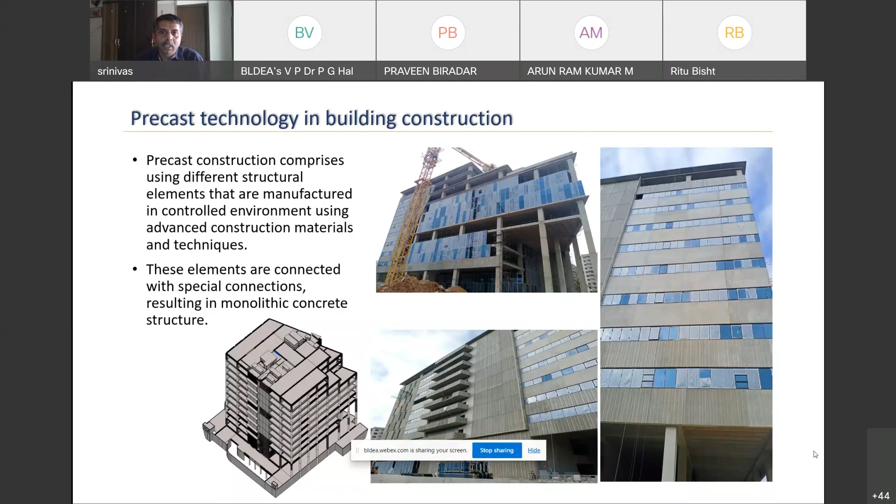So why are we looking at precast when we have very good cast-in-situ construction going on, with a lot of people working on this? First of all, there is always a dearth of skilled labor. So with this, you always have to resort to some kind of alternate construction, and the answer would be something like precast for that. Apart from this, developers are also looking to adopt modular technology so that they can save a lot of time. And the ask is always definitely superior quality, sustainable products, durable products, and more aesthetic appearances. So with all this demand, and also the current pandemic situation where there's a lack of manpower, the smart way to really achieve all such required things is precast construction, and that is the need of the hour.

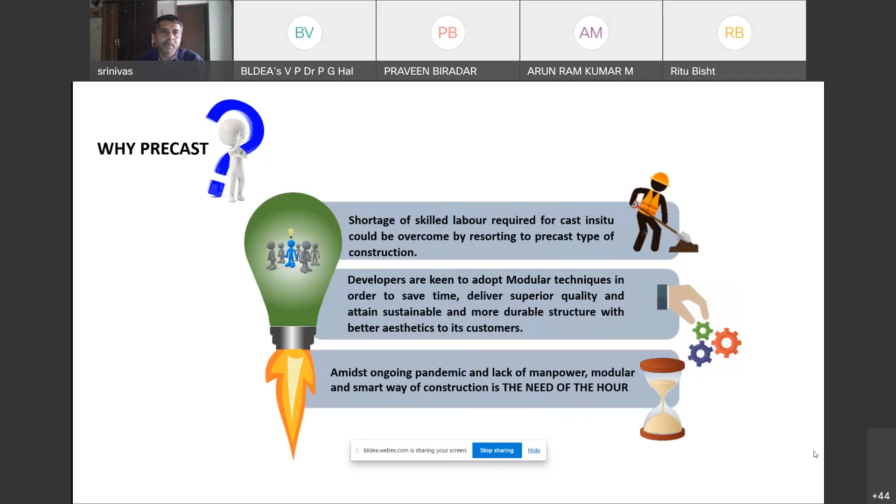So let us see all the kind of benefits we are getting with precast construction, so that we understand exactly why this has been adopted nowadays.

I've already mentioned the labor intensity you see in cast-in-situ construction. Usually when constructing buildings, you'll see hundreds of people walking around, a lot of activity happening. On the other side, what you see is precast construction, where one can also see multi-level construction happening compared to the single level on the other side.

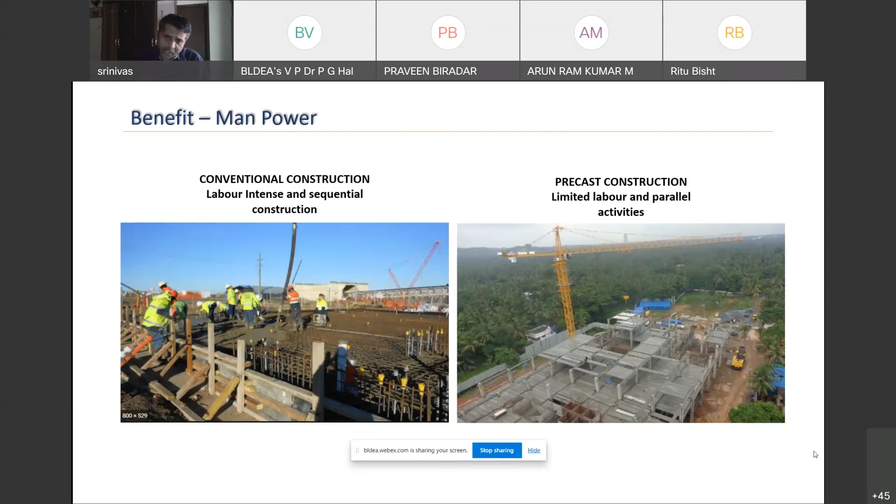Apart from that, you see very little labor intensity, just some machinery going on there. For a site like 10 lakh square feet or 6 lakh square feet, not more than about 50 people, including the project manager, engineers, and laborers, will be there on site. Especially for erection, you'll hardly see about 10-15 people. The rest will just be managing things. So this is the first advantage we really get from precast.

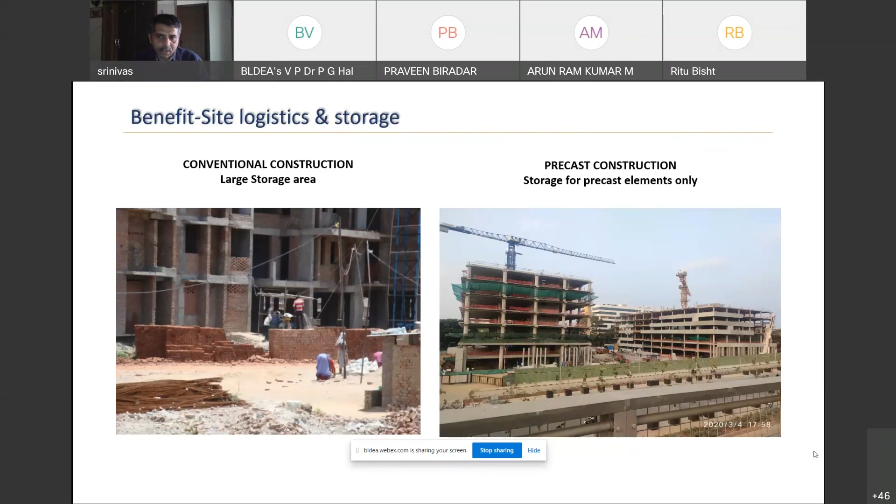The crane is a major kind of equipment which has to be used in precast construction. Cranes will also be used in conventional construction, the only difference is we'll have a little higher capacity cranes here. This is one of the differences we have.

And the scaffolding - in conventional construction, you'll have a lot of scaffolding materials to deal with. You have to support the members, then de-shutter that, and for any other work you'll have to put up scaffolding again. But in this system, we don't need scaffolding materials at all. It'll be designed in such a way that it can be self-standing, which will really help optimize the costs.

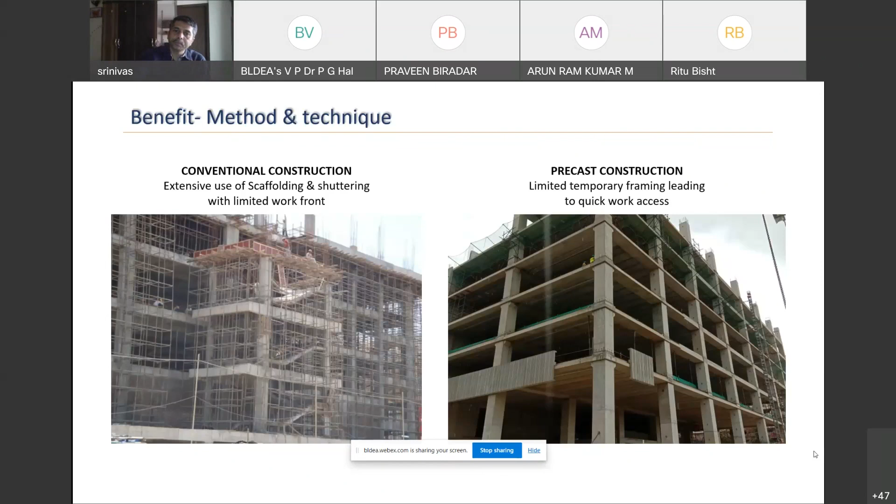And definitely, quality is what we always look at. It's not to say that cast-in-situ construction is very poor in quality - it's just a photograph depicting this, and there are a lot of constructions which have come up good. But what happens is in cast-in-situ construction, designers or anyone take a little liberty because they have a lot of chances to make changes during construction, and this leads to chipping in, breaking in, all those things.

Whereas in precast construction, we take care of all these things much ahead of construction - I'll deal with this a little later. So whatever finished product we get, it'll be a wonderful product. The one you see here is one of the hospitals which has been built.

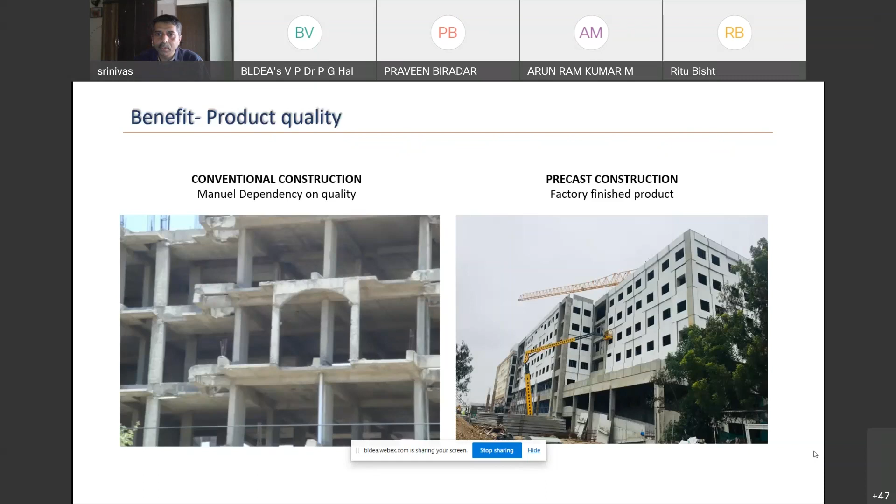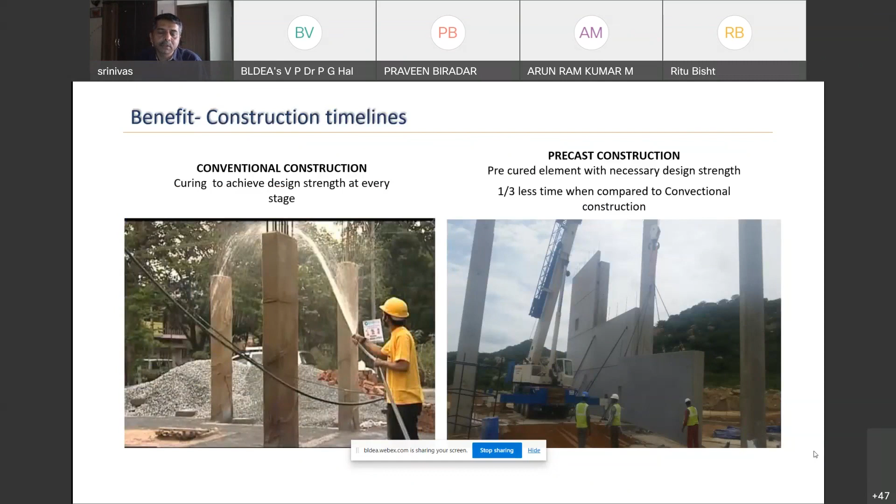Apart from this, the curing we achieve, since it's a very highly controlled product, the controlled environment really makes precast a very good material, and you don't have to spend anything on curing or anything further.

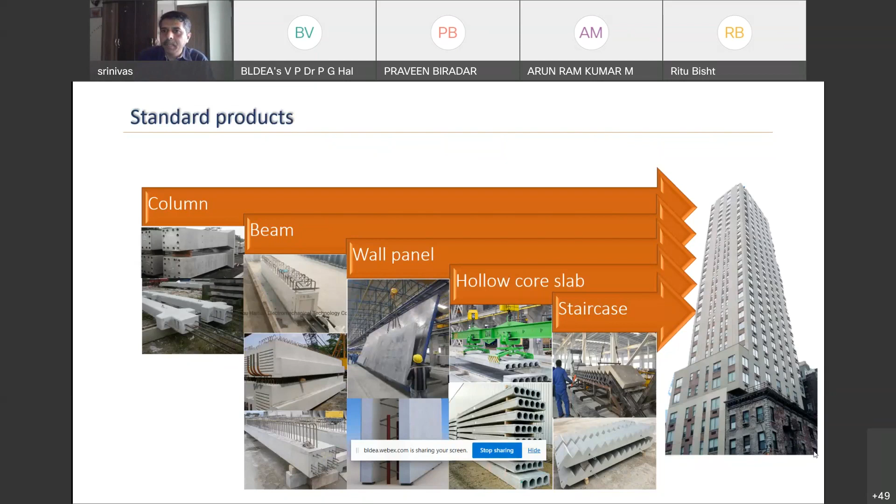Further than the structural elements, there are also things we use as architectural elements. One can use this as a finished product. The walls I was showing you, the solid walls, you can also have something called graphic concrete.

A graphic concrete is a technology that transfers custom or stock images.

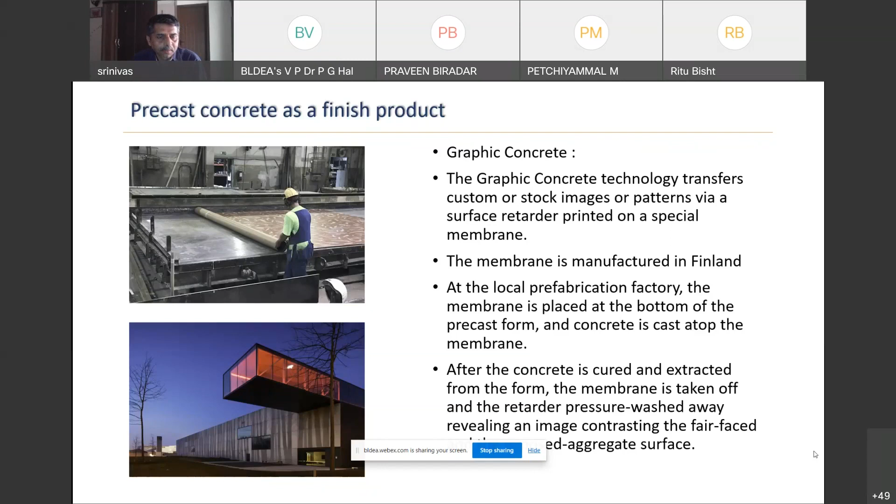You can see the contrasting fair faced and aggregate face just coming out, and you can see the images on the left hand side, where it almost depicts a kind of forest or whatever is there. There are a lot of other things which can really be done with graphic concrete.

Apart from this, there are also concrete form liners, called RECKLI forms. These are rubber-based kinds of forms, which can be used for repetitive uses, whereas graphic concrete is a one-time kind of use.

Once the pressure wash is done, that membrane is gone, and you'll have to have another roll of paper or whatever to be laid. But with RECKLI forms, that's not the case, you have a lot of other patterns available.

One can actually get into this website, and whoever is interested can look into that. You get a whole variety of forms which give beautiful patterns, and these are walls we usually use for facade kind of construction.

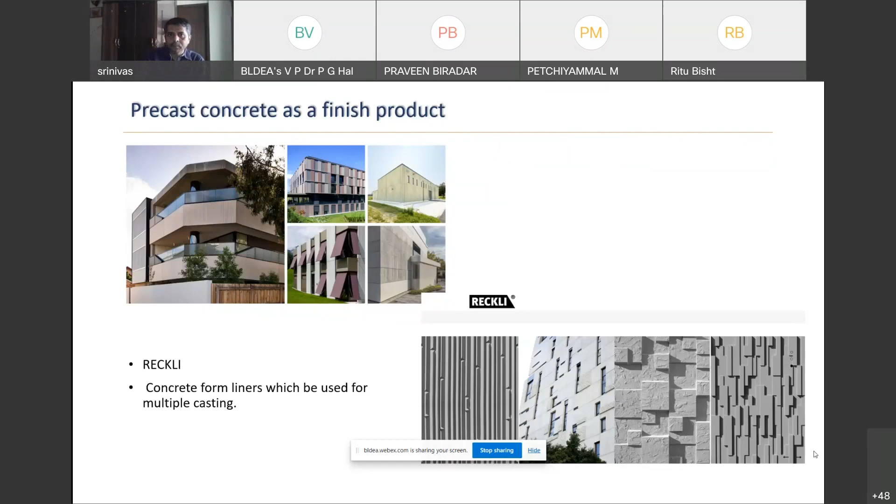So all these products are actually manufactured in a controlled environment. That is what I was saying from day one, I mean from the earlier slides.

In precast, one has to literally have very good knowledge of what plant you're dealing with. The reason is all your members or whatever is there have to be designed according to the limitations of the plant. So a designer has to keep in mind the plant limitations, and based on that, the member sizes have to be in accordance with that.

So the next one is the hollow core bed. The hollow core bed usually is around 100 to 120 meters long, with pre-stressing strands and abutments on either side. These hollow core slabs are pre-stressed, and there will be extruders used, and machines which will be used, wherein you can just get the hollow core out.

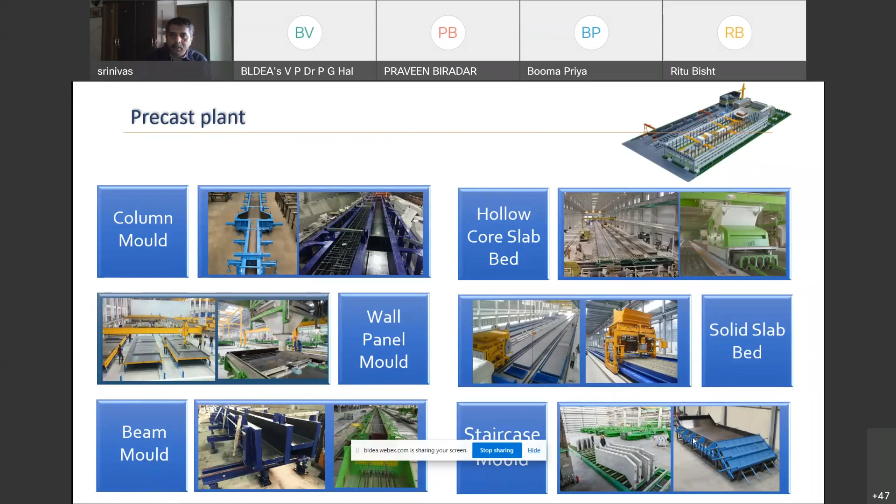Apart from that, beam molds, then again with the pre-stressing kind of unit here, then the staircase units. This kind of facility will usually require a lot of capital to install all those things and then invest in that. But alternatively, there is also a way where we can have a mobile plant.

The drains, and there are a lot of other things. I think what we are doing right now is on a similar basis, that we use the existing site, which requires a certain amount of space. So we put in all these molds there, and concrete is cast there, and directly installed as soon as it's ready to be installed.

The advantages of this is that you will save a lot of logistic cost from the factory to the site, if one has to transfer all those things, the cost involved in that. But in a mobile plant, you can definitely get away with that.

The only other limitation is that you may not find a pre-stressing bed here, which has to be actually - you will have to get it from the factory itself.

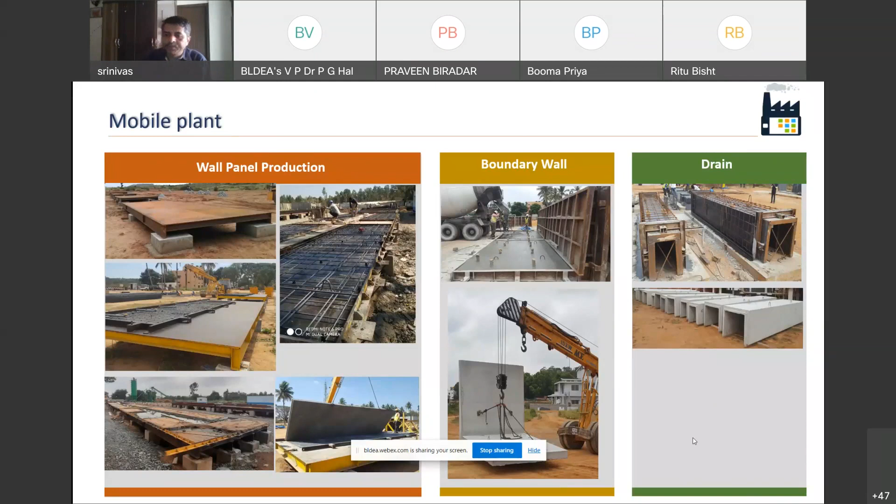So let us understand how the precast construction flow would be. The first thing is the design information and coordination. The design involves three stages: design information and coordination, the structural design, and the 3D model production drawing. These three form the first part.

Here one has to understand that once you're doing the structural design, along with that you'll have to have a lot of coordination with your services so that everything is accommodated. This is where the 3D model production comes in, so that you can have a view, and there should be harmony between the structural elements and also the MEP requirements. Once you have all those things, the member sizes and all those things get frozen.

So with that, there'll be a shop drawing production which goes to the element production. Then usually what we do is the foundations will be cast in place. It's usually after the foundations are done that the members will be transferred to the site and the installation happens, and the finish and handover is the execution part.

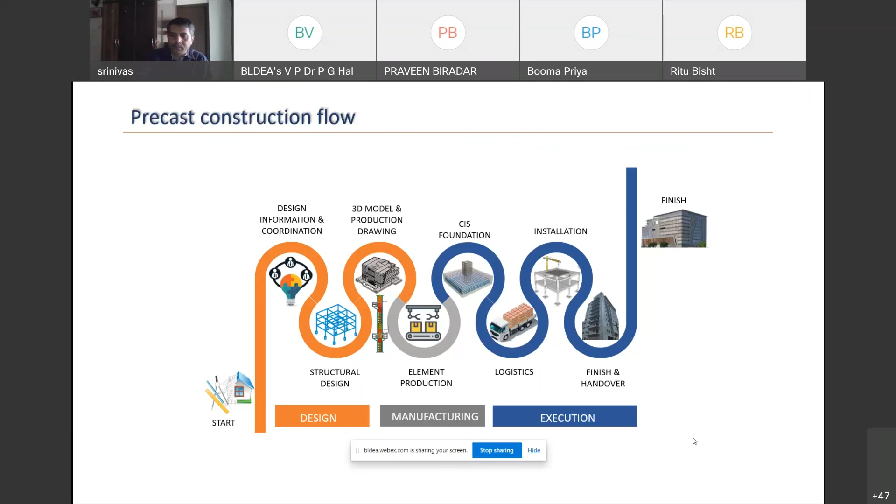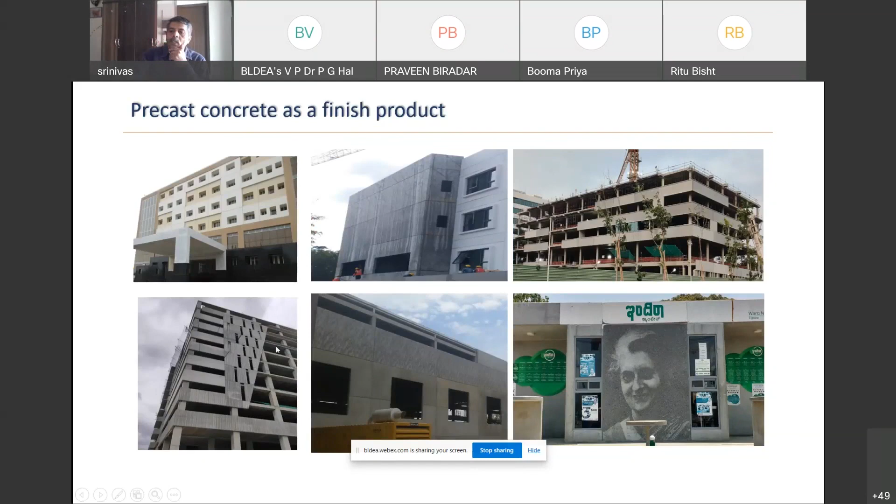So after this, I think we'll just start on how a design process, or what all design would really require in a precast kind of building. I'll briefly tell about all these things because it's a vast industry, and every person will have his own methodology to design a building, and everyone will have their own ethics to follow.

What we generally follow is there are a lot of methodologies listed in PCI and everything, but here, with the conducive environment, we have to get the cost as low as possible. So we deal a lot with wet connections. I'll be dealing with connections which are almost easy to produce inside, and also far more economical than ready-made connections. So the next slides will deal with all those things.

Precast construction is definitely far different from a conventional reinforced concrete structure. The first thing to keep in mind is we can't just say every building can be built with precast. One has to ensure that the site and surroundings can accommodate heavy traffic vehicles, and we need to see whether a 40 foot trailer can actually come and dump the elements. So we'll have to first check that feasibility.

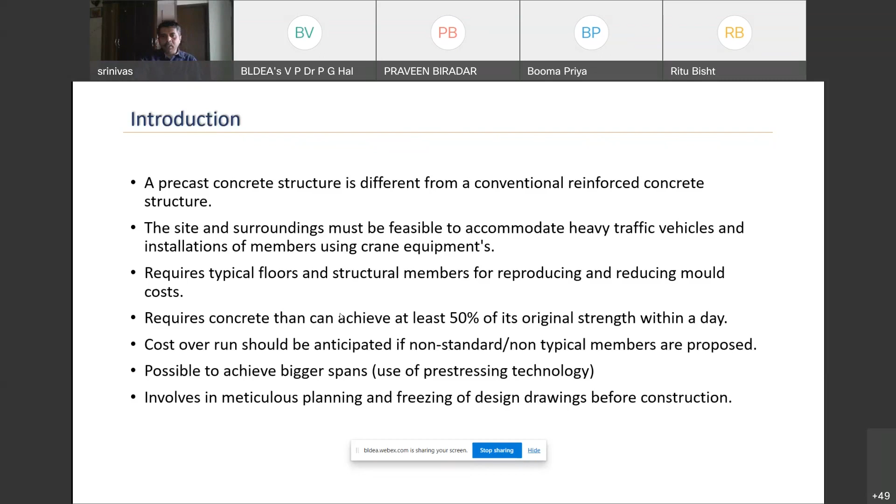The other way is we also want to achieve bigger spans. So one way is definitely using pre-stressing technology, and we'll have to see all those things much before when we are doing it. All this has to be seen very much in the planning phase itself.

Whatever we do, the first thing is when we pour concrete on any table or wall, we have to see the early strength gain, so that it can be demolded easily and the mold can accommodate the next casting. So this process actually involves an initial load at the early strength.

So prior to its use, the concrete's initial strength is used. There will be some tension steel for the following. The tensile strength of concrete will usually be around 8 to 14% of its compressive strength, so cracks tend to develop at an early stage of loading in flexural members. Hence, to reduce these, one method is using pre-stressing to counteract that. To prevent such cracks, a compressive or pre-stressing force can be suitably applied in the perpendicular direction. Pre-stressing enhances the bending, shear, or torsional capacity of the flexural members.

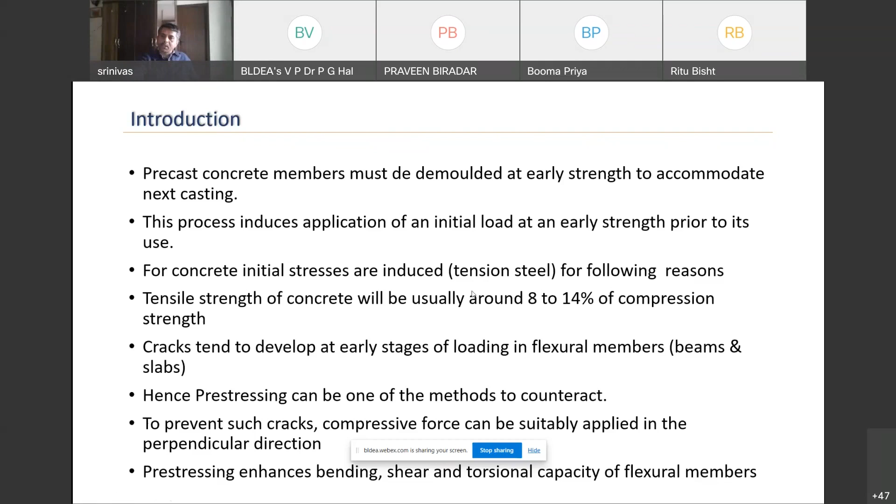The section should remain uncracked under service load. So pre-stressing increases durability, gives proper stiffness, and results in less deformation during the lifting procedure. It also increases shear capacity, and improves performance under dynamic and fatigue loading.

Usually with materials without pre-stressing, you see a very low span-to-depth ratio. Whereas with pre-stressed structures or slabs, you have a higher span-to-depth ratio.

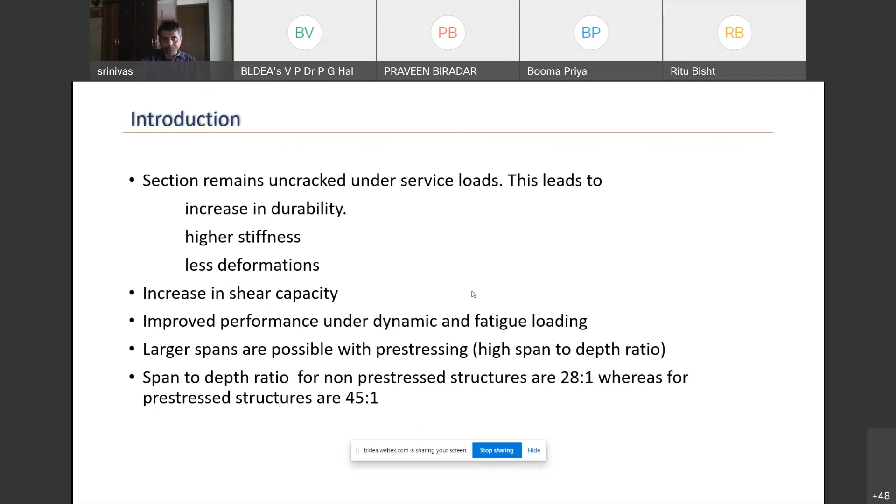Also, using pre-stressing technique, we can reduce the self weight, and this can help in better quality, reduced maintenance, and repetitive construction.

This is what I was really stressing about. When we design either beams or slabs, we need to have a similar strand pattern, because we are using longer beds. I can't have different strand patterns for different beams. So we need to standardize things such that most of the beams have a similar strand pattern. If not, we still use a similar strand pattern, but if the beam doesn't require so many strands, we have to debond them. That's another way of doing it.

The compressive strength of concrete is always around M40, and the tensile strength of the steel tendons is much higher than that.

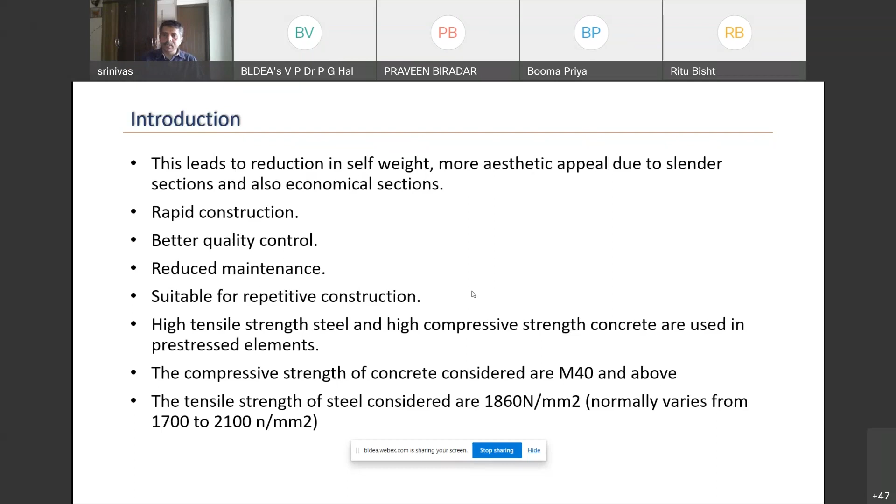So what is the framing system we usually follow here? As I said already, the foundation shall always be a cast-in-situ kind of system. I'm talking about commercial buildings where we cannot go ahead with precast foundations.

So the foundation will always be cast-in-situ. For the basement walls, the most preferable system is a double wall system, which is easy to install. The dowels from the foundation protrude out, the double walls can be installed easily, and the concrete is filled in. This gives a very good effect, similar to what we see in basement walls.

If this is not possible, because at times there are limitations with double walls with respect to seismic zones, requiring more shear links, there will be some limitations there. In such cases, solid walls will definitely be used.

Then the column with corbels - you can definitely see here, the columns will have corbels which will support the beams on the corbels.

The beams you see here are usually L-shaped on the periphery, and inverted T-shaped in the intermediate spans. The L-shape is to accommodate the slab on one side. The internal beams will be T-shaped so they can accommodate the slab system on either side.

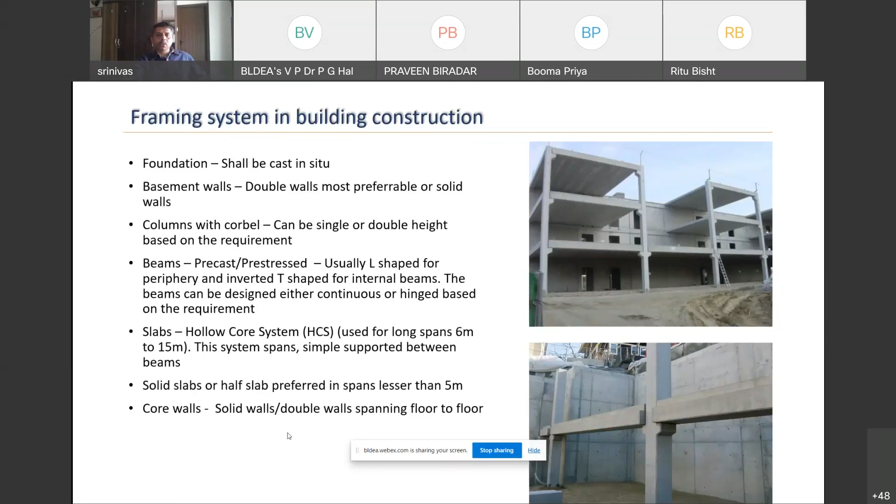These slabs are simply supported between the beams. Apart from that, solid slabs or half slabs are also used where the spans are much lesser. Core walls, as I've already told, can be solid or double walls, which will be spanning floor to floor.

Design process. What are the major steps we follow in the design? The first thing, as I've already briefed you, is framing layout - one of the most important things we have to deal with. We need to decide what kind of system we are building, and we need to have a framing layout. Preparation of a DBR, I think we do it for every kind of construction.

Then modeling and analysis. In precast construction, we just model the structure very similarly to cast-in-situ construction. There is nothing special what we do. This will be the first cut kind of analysis. All the members, whatever we take, shall be designed as we do in cast-in-situ.

But wherever the slabs are coming in, we shall assign them as a single or one-way kind of slab. It will be spanning only in one direction - you cannot have a two-way kind of action here. Check for all the code requirements - this is very important - and then check for the element design, the foundation design. What we do normally is very similar. Then what comes is the preparation of a 3D model, which elaborates every detail to perfection.

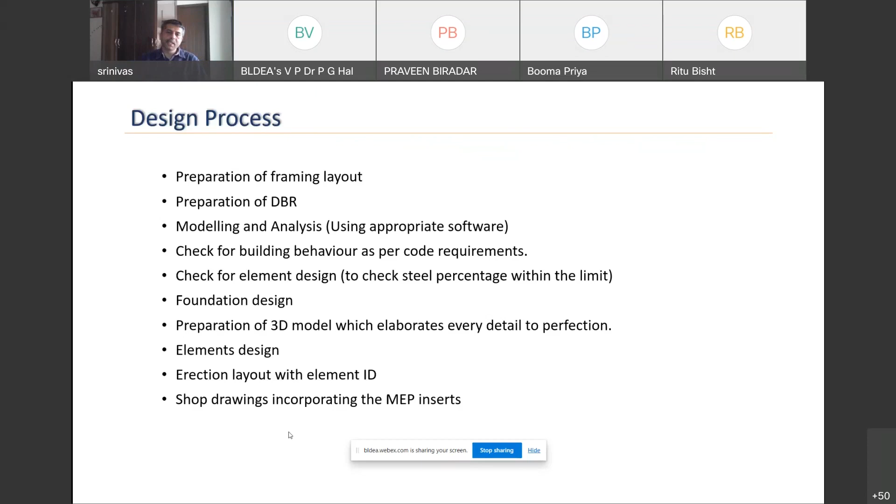What are the code requirements for basic design? I don't want to list out all the codes here, just the main ones required. All codes related to RCC design based on our IS standards. Then the other code references we really go with are ACI 318, BS 8110, and also the PCI handbook - I think there's a latest edition, maybe an eighth edition, though I've just written seventh here.

PCI handbook is a very detailed book for precast and prestressed concrete. It gives a lot of insight into all kinds of connections, how the construction has to be made, and most of it is derived from the PCI handbook, which we try to adopt for our codes. These are the main kinds of references we really make.

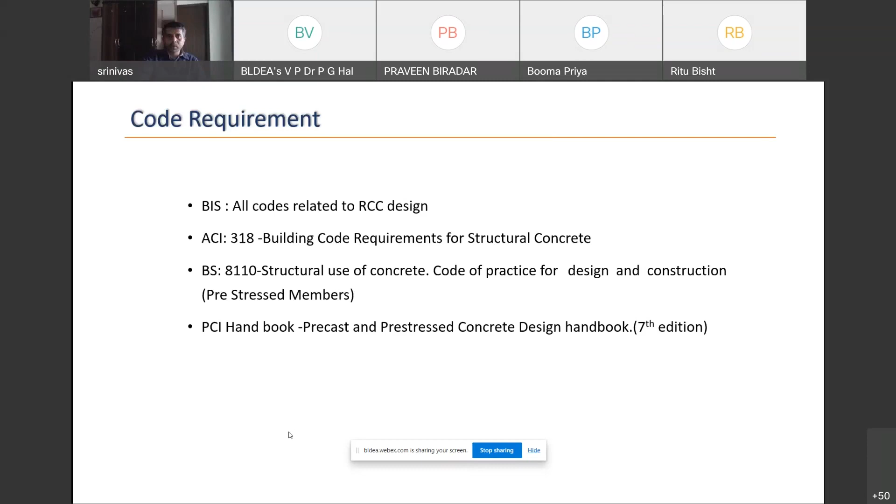What are the concrete grades we generally use? Footings are around 30 MPa, then columns will be around 60 or even 40. Shear walls, retaining walls will be around 40 MPa, staircases and all those things too. Anywhere we use prestress, we go up to around 60 MPa - that's for hollow core slabs and prestress beams. There'll also be a topping on any kind of slab system we adopt, which will act as a diaphragm, usually around 40 MPa.

What are the advantages of this hollow core system? If you see a hollow core which is around 160 in height, the effective thickness of that reduces to almost around 101.9 when you compare it to the solid slab. So definitely, compared to the solid slab, the weight of the hollow core is always lesser. So how do we know this?

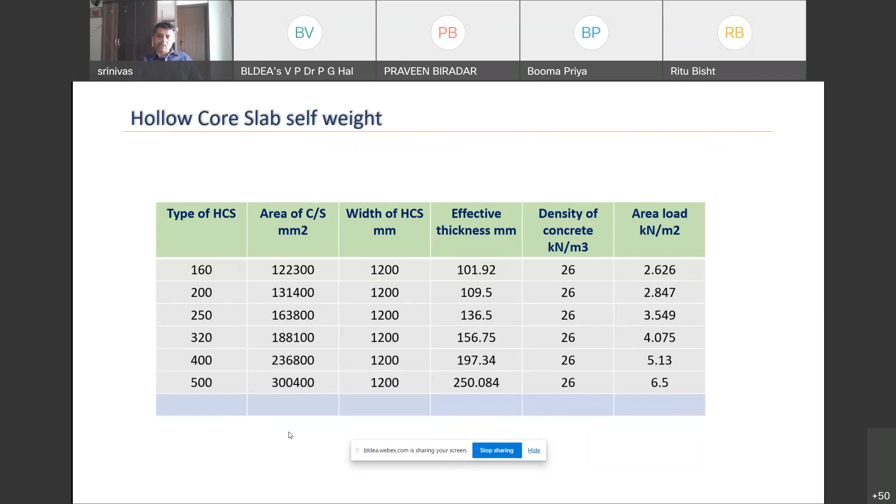There's been a kind of study I have just analyzed on all the structures - a typical flat slab conventional structure, compared to the same building using hollow cores with some beams. If you literally take the slab to slab comparison, it was around 41% lighter, and it is also energy efficient.

I did not go ahead with any pre-stressing strands for the beams here. If you start using that, it will be far more lighter, around 15% lighter when using the pre-stressing technique. So overall, when you compare the mass of the building between precast and cast-in-situ, the building is almost 20% lighter. This is one of the good advantages we can take and have some good optimization done. We have to see this with the geometry, but definitely using hollow core will help any structure reduce the weight.

So we were talking about hollow cores. The other thing is the half slab itself. Half slabs are also called filigree slabs. You have trusses or shear connectors on top of the slab. Suppose if you require about 150 thickness slab for any span, usually we cast only about 90, which can take care of all the initial loads - it should satisfy the lifting criteria. Once this criteria is done, it will be placed on the frames wherever intended, and the rest of the concrete is just cast over on top of it. So the slabs will be good enough to take the construction loads and also the lifting criteria. This is what we have to really look into when we design this kind of slab.

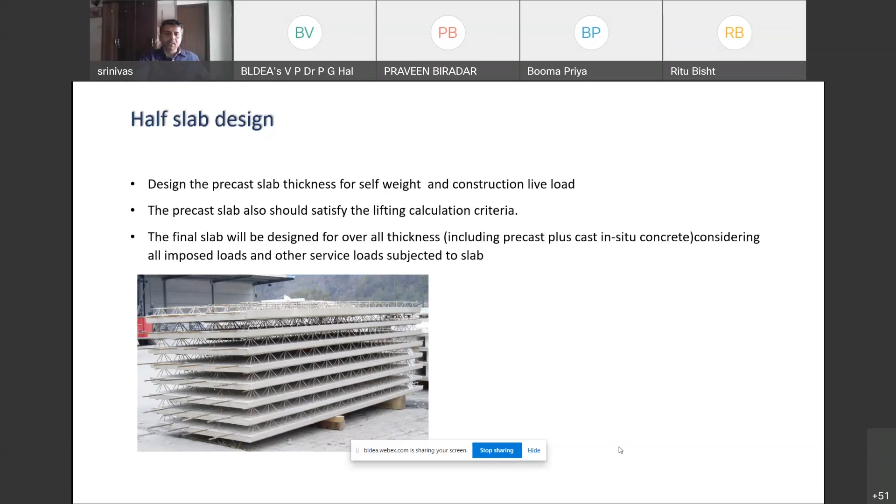This kind of slab is very much used in small constructions. Hollow core slabs are not preferred in the residential sector because you will see grooves between each hollow core. The hollow core is about 1.2 meters wide - that's what the bed allows you to cast. So you'll see this kind of groove, which most people may not prefer to see in the ceiling. In such cases, we can go with this half slab design, wherein you can cover the entire room for the residential sector and still suffice the precasting needs.

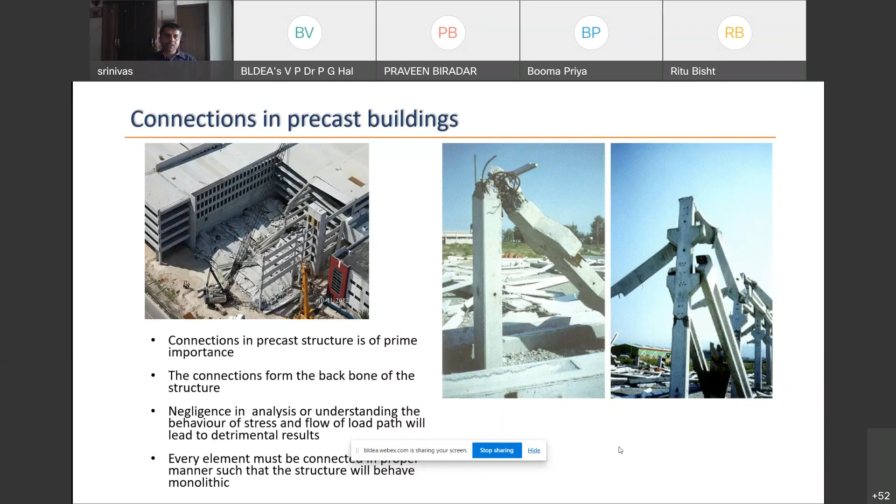So let us start off with the first thing we really want to start with - a foundation to column and column to column connection.

Whatever we analyze from ETABS or any other software - I don't want to call it ETABS, whatever software we use - the column steel is extended into the footing so that it acts monolithic. In a similar way, the dowels originate from the foundation. One important thing to see here is that usually in columns, in the midway, we do a 50% kind of lapping, but in precast construction this is not possible. Since the rebars are already in place, the lapping happens at the same zone. So if you refer to SP34, when the lapping is at the same place and each bar gets continued at the same location, the development length you have to follow is around 1.7 times LD.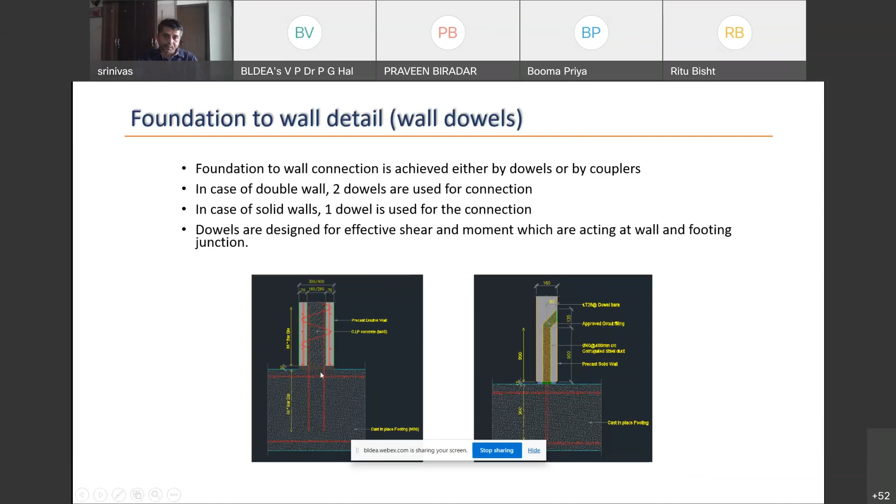But generally we may not find double wall everywhere, because procuring this double wall mold itself is a costly affair. So we may have to deal with a lot of solid wall connections and those things, which I'll be dealing with in future.

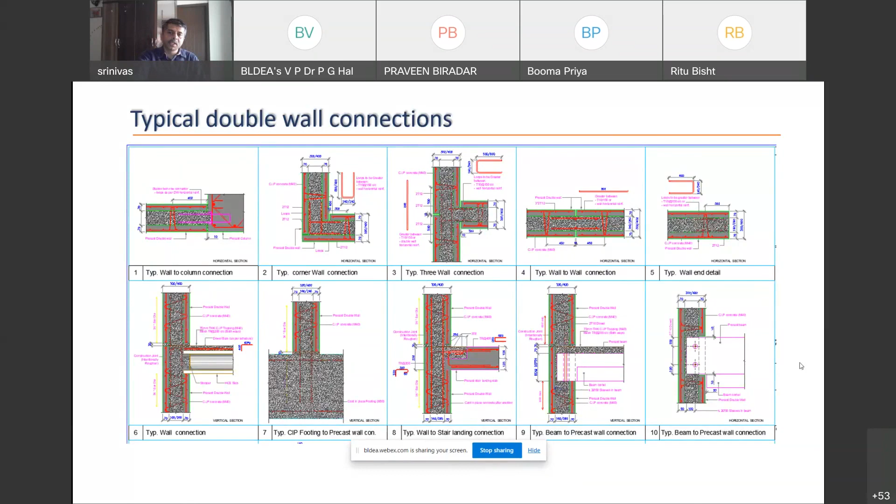The next thing we also see is the column to beam connection. One has to understand that based on the analysis, whatever we do, there are different kinds of connections we can achieve.

Usually in our buildings we tend to do a kind of moment connection between the columns and beams, which is largely accepted. In order to achieve such connections, the beam spans between column to column, and then it will actually be resting on the corbel. We'll deal with the corbel a little later.

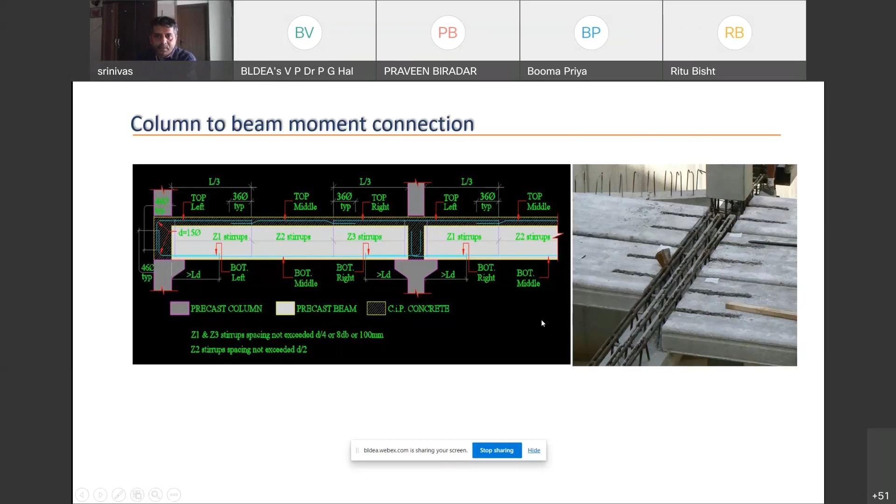The next thing is just a hinged beam connection. This is, I think, most common. The problem is how we go ahead with the analysis. We would always like to have a dual system working. In such cases, we need the moment connection to work in, if at all we have the luxury of having a lot of shear walls everywhere across. There is something we can also use with column to beam, which is a hinge connection.

In such types, what happens is we can have a column which can be at least double height or triple height. So the pace of construction will be much faster because your columns are standing for about 2-3 levels, and the corbels will support the beams and the beams will support the slabs. This is a simple connection. There will be no protruding bars coming out of the beam into the column.

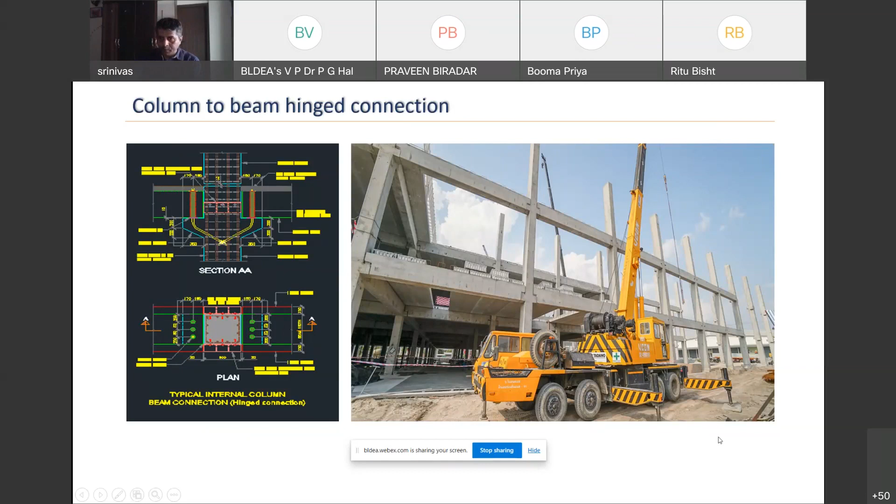So what do we see when we are talking about beams? There are a lot of things we have to literally take care of in terms of the beam design. The first thing is that whatever beams we design, all the beams are analyzed as a separate case.

Apart from whatever you do as your first model, there'll be so many other cases you'll have to analyze for the beams also. As a separate case, we'll have to analyze the beam as a hinged beam and design it for self-weight itself, and for the slab and the construction live load, because usually this will be for the longer span beams, because once you put it on top of the corbel, you would still not have achieved any kind of wet connection or moment connection between the column and the beam.

It will be resting on the corbel. So the beam at that point will still be acting, or the ends or supports will be just as a hinge point. There is no connection there, no fixity. So in order to handle that, until the wet connection is complete, the beam acts as a hinge. That's the reason these loads are considered, this is one of the cases we have to consider.

The beams are further checked for the live load and dead load with the factors, and all the relative seismic or lateral loads are also checked for. Apart from that, the top reinforcement, what I showed in the earlier figures, is nothing but the reinforcement for the moment resisting beams, checked again for the other cases, and all lateral cases are checked for that. Those are the lateral bars we give. I'm sorry, the top bars we give are for those connections.

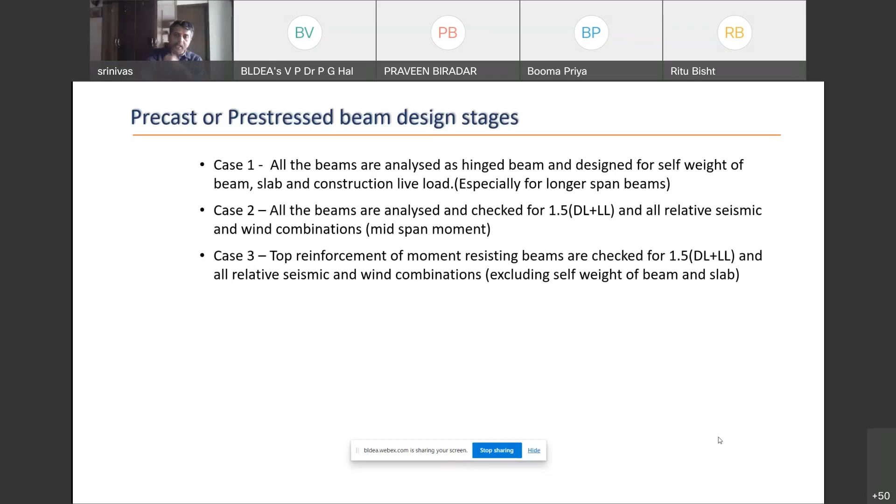The other kind of connections, as I already told you, is where the beam will be carrying the hollow cores or the systems. So this is like an L beam, and another kind is your inverted T beam. You will see hollow cores on either side, and there'll be a topping on top.

One has to ensure that whenever there is a screed or something coming on, especially with this hollow core bed, you need to have a broom surface so that there's proper bonding between the new concrete and what you wish to have.

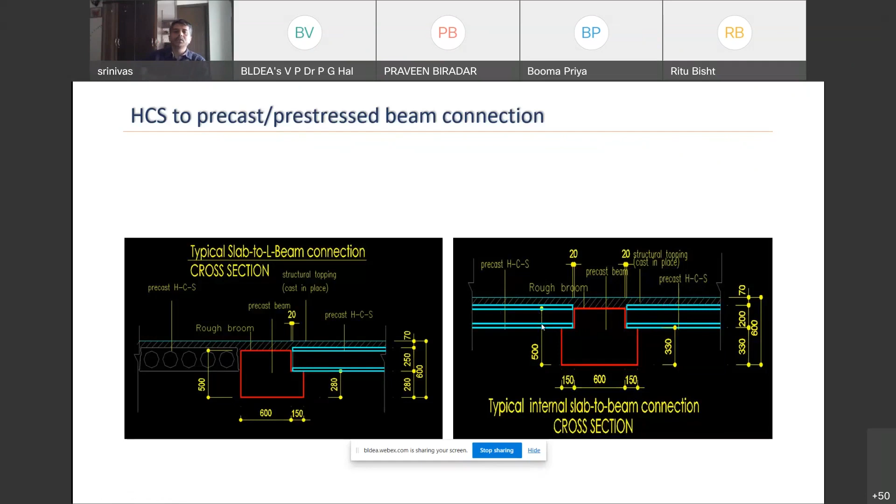Now let's come to the corbels. The corbels are the main important things, the kind of system we use in the construction of precast. Corbels can be analyzed in two ways: one is the cantilever beam method, the other is the strut and tie method. This is a very simple method that everyone follows, and I think the design is well known, so I don't have to elaborate on that.

The things you have to take care of here is the corbel can only be designed in terms of wherever the moment connections are coming in. This can be designed only for the dead loads or construction loads that come in when you are doing the installation. You don't have to design your corbel for the entire complete load, because if you are doing a moment connection, the corbel is required for the beam to be placed on it, and then the hollow cores will be placed in the beam.

So once this is done, the load path of those dead loads has already gone to the column through the corbel. Then the protruding bars on the beams, where you do the wet connection, will take care of all your lateral loads. So you don't have to design your corbels for the entire load. This is my view here.

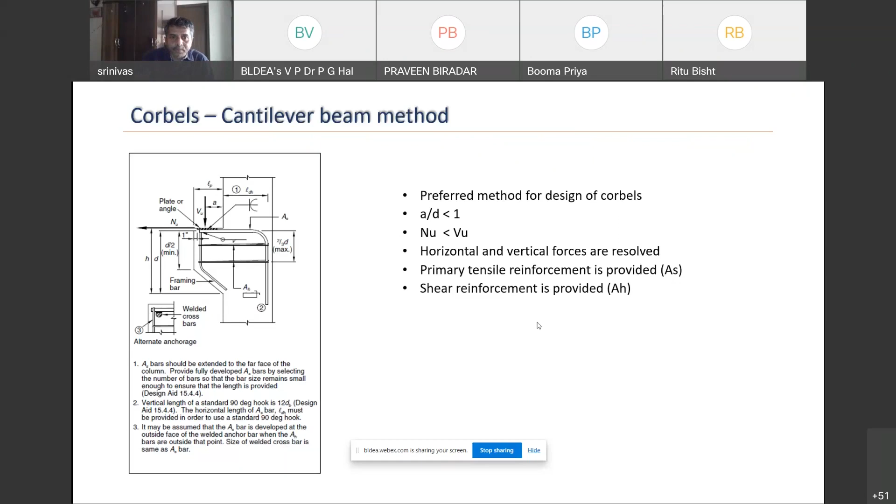The other method I told you about is the strut and tie method. It's also a way of analyzing the corbel. So it is up to the designer to choose whichever is comfortable, the cantilever beam or strut and tie.

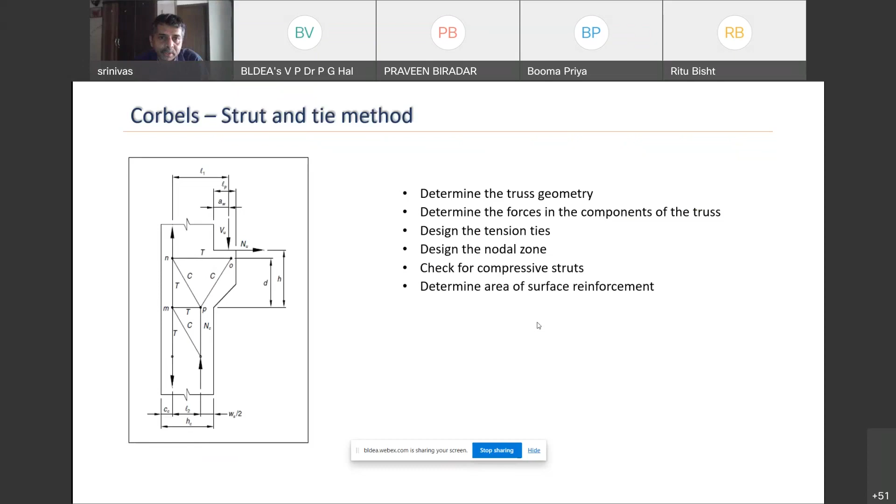What all we should also consider doing here - one has to see that when we are using it, because the prestress force causes it to upheave by itself. So once this is done, and when you're resting it on top of the corbel, there's every chance that there is lesser bearing on top of the corbel. This has to be properly analyzed.

What happens is, when you have a corbel of a certain width, say around 150 as a width of the corbel, then you'll have to have tolerances of around 20 on any member. Apart from that, once you have a 20, and due to the camber this member achieves, you may not have complete bearing on the corbel. So one has to ensure that whatever bearing surface is available is sufficing the bearing loads.

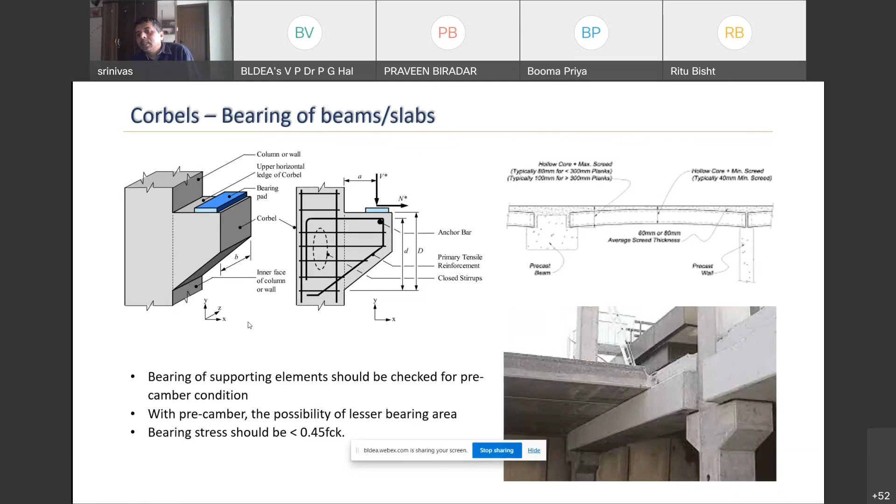So we have to ensure that, and then go with proper detailing of this, or increase the width of the corbel so that the structural members are completely bearing on the system.

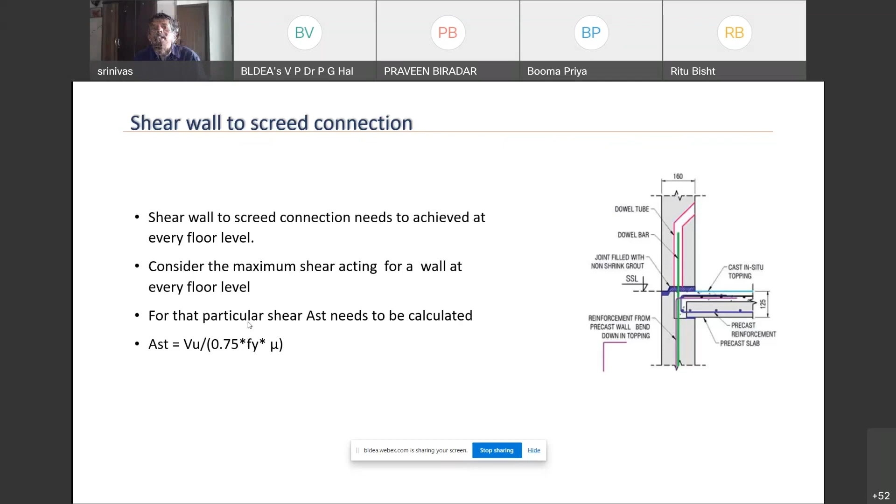Apart from this, there is something called the shear wall to screed connection. Here, shear wall to screed connections need to be achieved at every floor. So what we do is consider the maximum shear acting on the wall at every floor, the story shear, and therefore the shear wall to the screed connection is given.

Also, due to the kind of shear acting on these individual elements, there can be something like an overturning effect happening there. This is another check you have to do.

For the check of overturning, you have to have the resisting moment, which will be a factor of your dead load. Finally, you have to ensure that the dowels you give, or the net moment from the tensile or compression forces, is totally countered. We have to install the dowels based on this particular force, considering the dead weight of the member also.

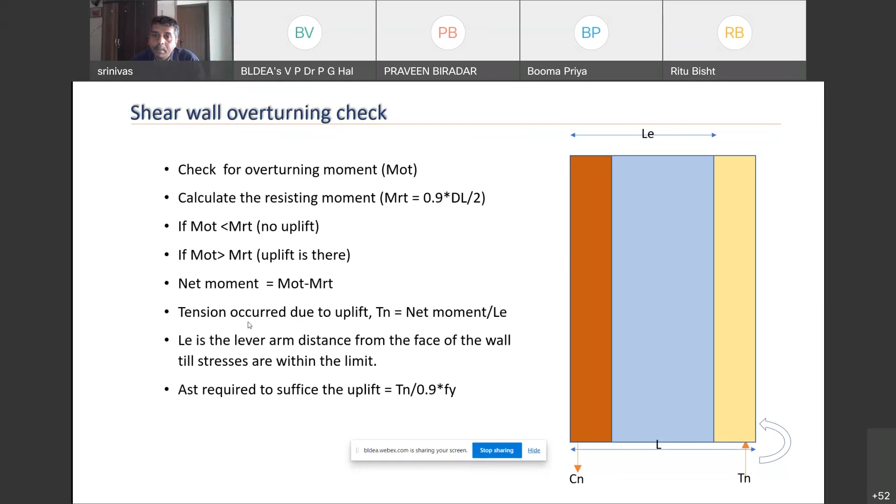The final important connection we see is called the shear flow connection. This is one of the most important connections we deal with in precast construction. When we design any kind of shear wall, we actually design it as a member where it is combinedly taking all kinds of loads.

I think we have dealt with this in our mechanics classes, so this we have to ensure. Whatever shear flow we get, the dowels are given along the height of the wall to get connected, and then the connections are possible.

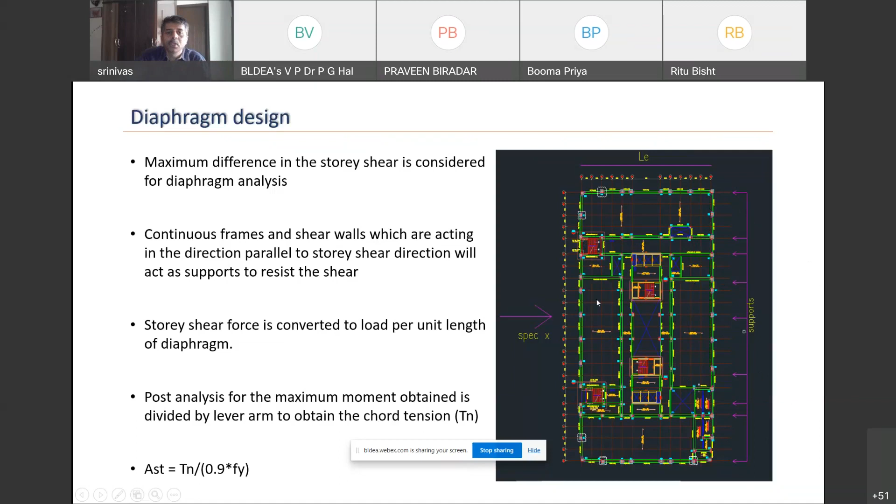Now let's get into the handling and lifting part, which is one of the most important parts of the precast industry. We always deal with heavy materials varying from about 2 tons to maybe even 10 to 12 tons. So one has to have proper knowledge of what the element weight is and the crane capacity used at the site. Based on that, the designer has to design or detail that particular kind of element based on the limitations we have.

So what all the things we have to see here. The loads and forces on the precast and prestressed members during production, transportation, and erection will require a separate analysis, because the concrete strength at this stage will be much lower and the support conditions will also vary compared to the final in-service position.

What happens is as soon as you cast the concrete, you want to demold it and then transport it. But there's every chance that this concrete won't have achieved its complete strength. So we analyze this structure separately, or in ETABS we give it as a different case, analyze it for its dead load and see whether the span moments are good enough for a lower strength. It cannot be designed for its design strength.

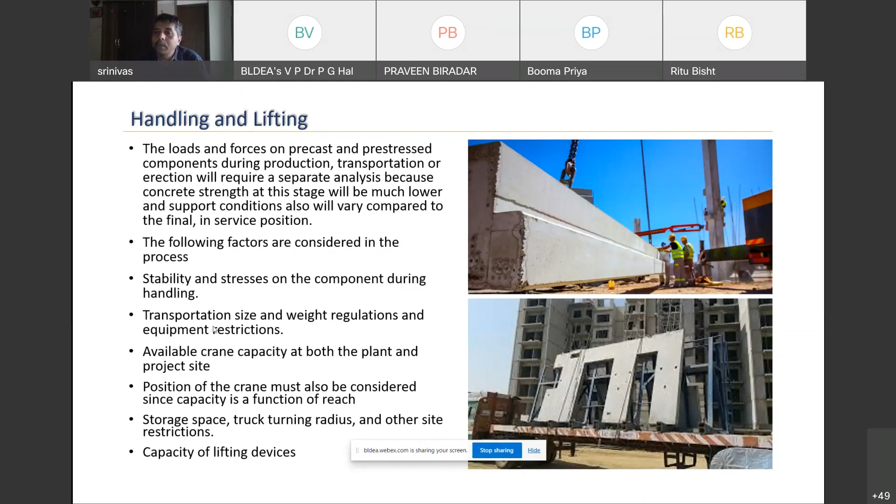Apart from that, when you design your building, you should also know where your crane is positioned, because the radius of your crane at the tip matters—if there's an element to be installed that's really heavy, you have to consider what load the crane can take. Based on that crane, you'll have to design, cut down, or do a half-cast beam or whatever element you're dealing with. We have to look into those aspects.

So how are the usual lifting hooks given? This is a pickup from the PCI manual. It shows for a typical panel and also for slabs, there's a 4-point pick, and also a 2-point pick for a vertical and horizontal pick.

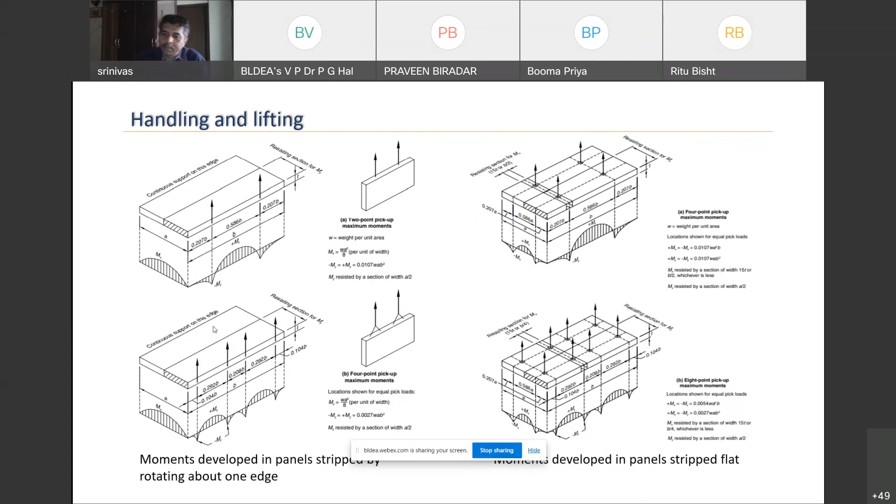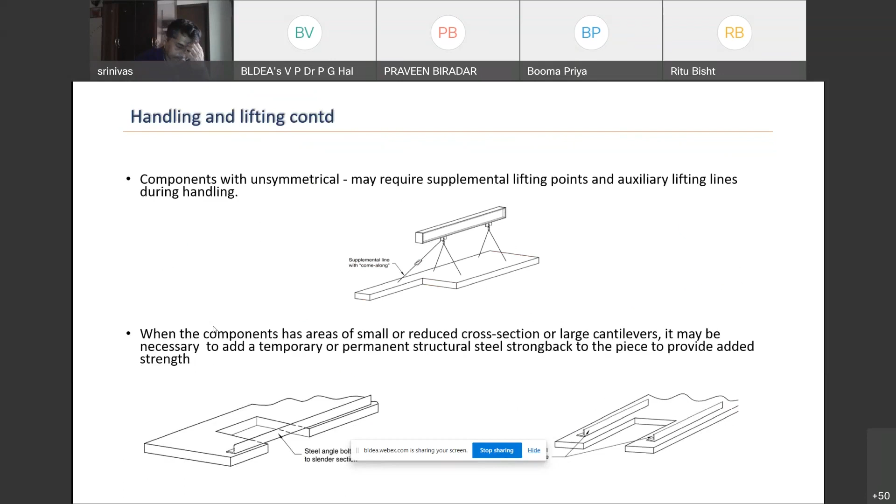Apart from this, there are other lifting conditions. Suppose you have an opening, you may have to give some kind of a supplement member during lifting conditions. This helps the entire member act steady, so that you don't see any cracks in the future.

With all these things, we develop a 3D model. All the information is put in, we have designed it, all the connections are done, and we know how the lifting technique is going to come in. There are a lot of other softwares like Revit or Tekla that we use to develop a 3D model.

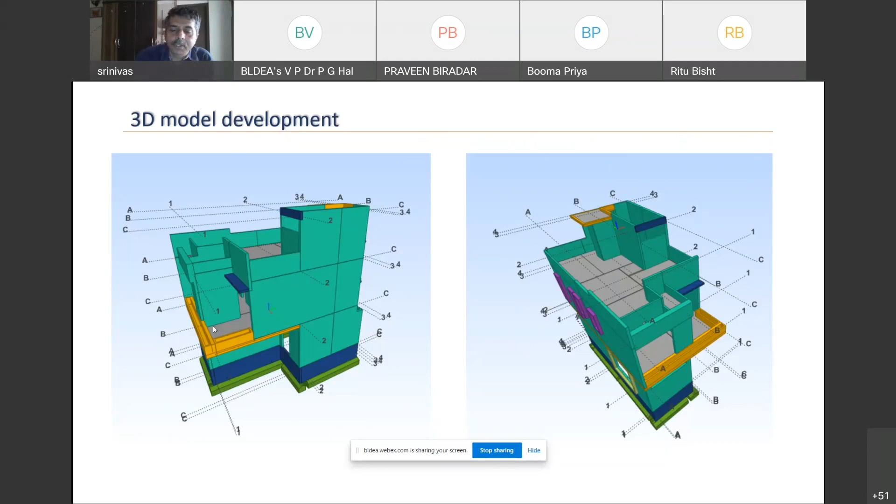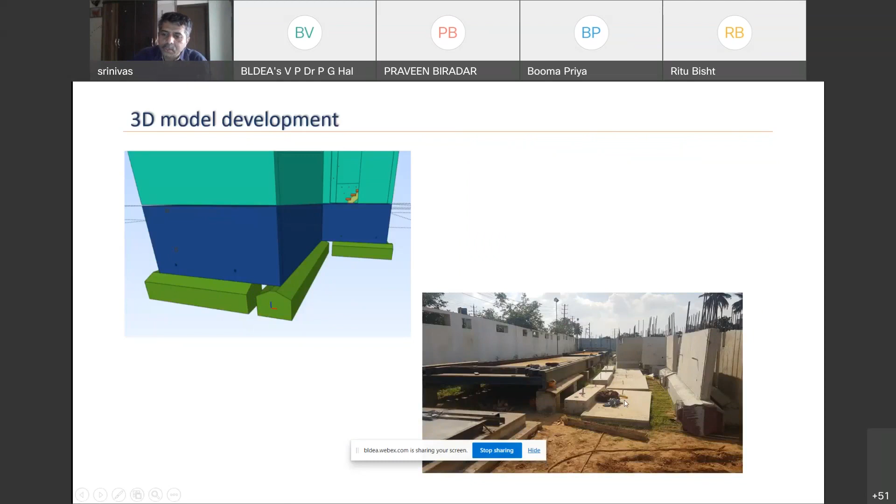So here, we also went ahead and designed precast footings, because this is a small villa. With the site cast, one can see we developed footings along with the walls, and at this junction we had a wet connection done here. These are the molds, and you can see the live footings installed right up there. So these are some of the shop drawings we deal with.

So this is the typical foundation drawing, and the details, every detail, every rebar is captured so that all of us will exactly know what's the consumption of materials we are going ahead.

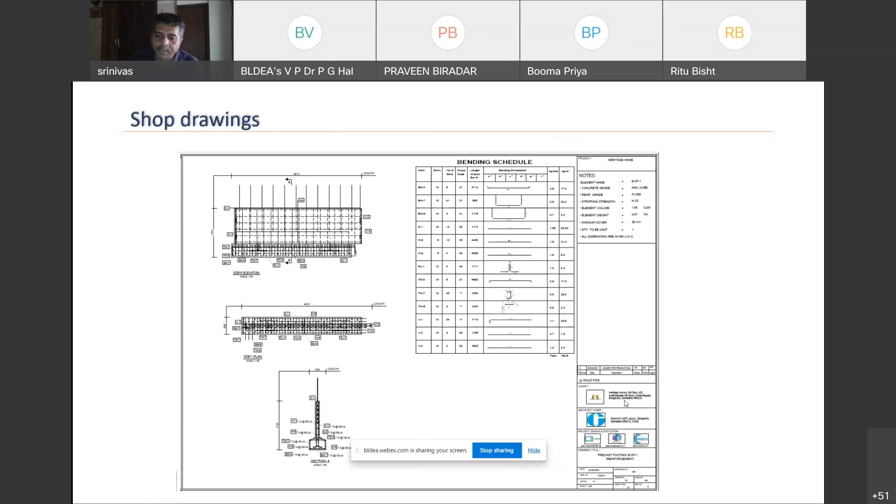This is a wall detail. These are the temporary bracing we give at the openings. All the MEP inserts are shown here. This is a coordination level we do, and then the dowels which get connected on top. All these things are shown.

So this is another wall, along with cross ties at the openings. All these things will be detailed, and you will exactly know what's the kind of consumption we are going ahead. This is one of the main advantages in precast, where we don't have to literally worry about what is the amount of steel we have to use later on.

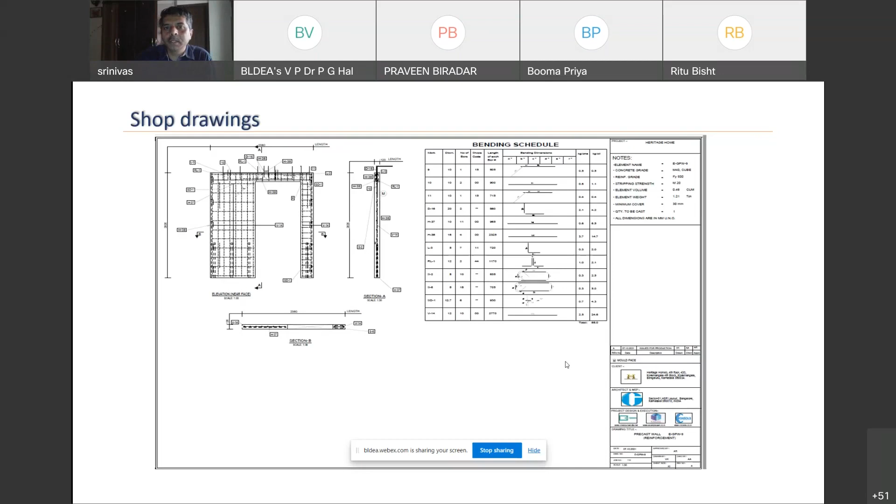There'll be a lot of arbitrations which happens on this, usually in cast-in-situ big constructions. But in precast, I think one will have a pretty good idea of what is the amount of concrete and steel consumed. So this is the villa I showed you as a 3D model.

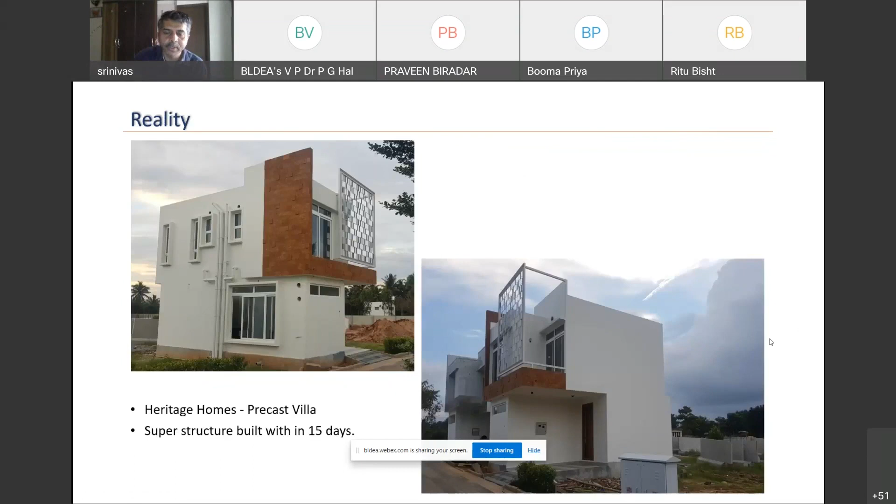This is a villa we built. There are about 50 villas coming up right now, and this entire villa was built in 15 days. This is one of our achievements. The superstructure was built within 15 days with precast technology.

So we were also dealing with a lot of joints, and the thing is we have to treat these joints. The joints have to be in such a way that all the column connections and all the intersections between the column, wall, and slabs have to be treated.

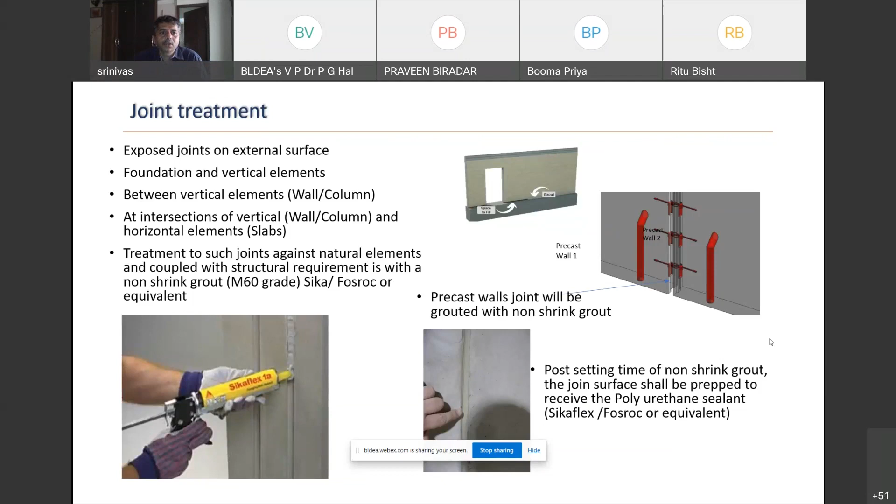Usually what you do is a connection using a non-shrink grout. This non-shrink grout gives very good durability characteristics such that you don't see any kind of leaks. There are a lot of grouts available from Sika or even Fosroc. These are the kinds of non-shrink grouts we use for the joints.

Now this is just food for thought. Like I just explained, whatever we do are more complicated things, but in India I think we have age-old structures which are centuries old, and these are all modular construction. What they have done, you can see columns, you can see corbels, you can see beams. I don't know what connections they've used. I don't know what lifting technology they've really used.

These structures have experienced all kinds of seismic or climatic variations, but they are more stable than whatever we do currently. I think we should design such structures, or we should learn a lot from these kinds of structures.

I would really like to see research done, and such connections or such buildings are studied so that we can have structures which are long lasting. One has to understand what kind of connections they really used. I really don't know - maybe there has been some research or someone has really gone through this. We should literally take a look into those things, maybe adopt into our technology, and then improve our own knowledge.

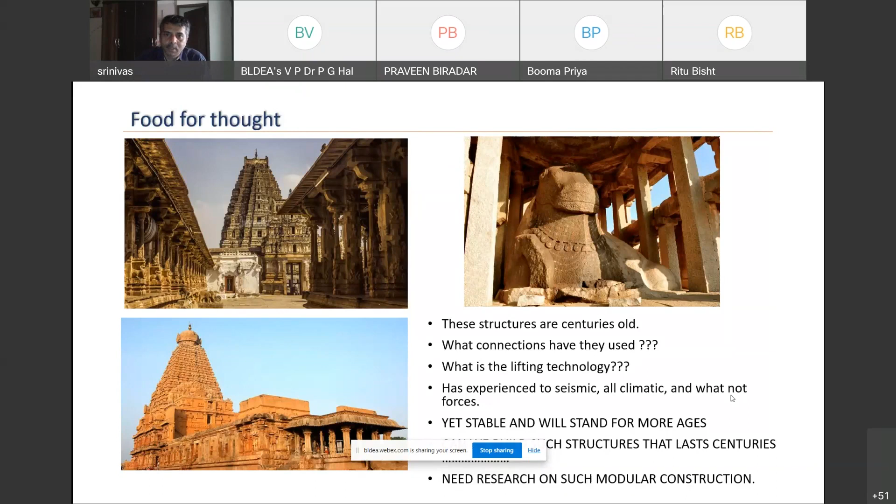So I think I have covered whatever is possible from my side and whatever the industry does. I would really thank BLDEA College for giving me a chance to express myself with respect to precast construction. Thank you very much.

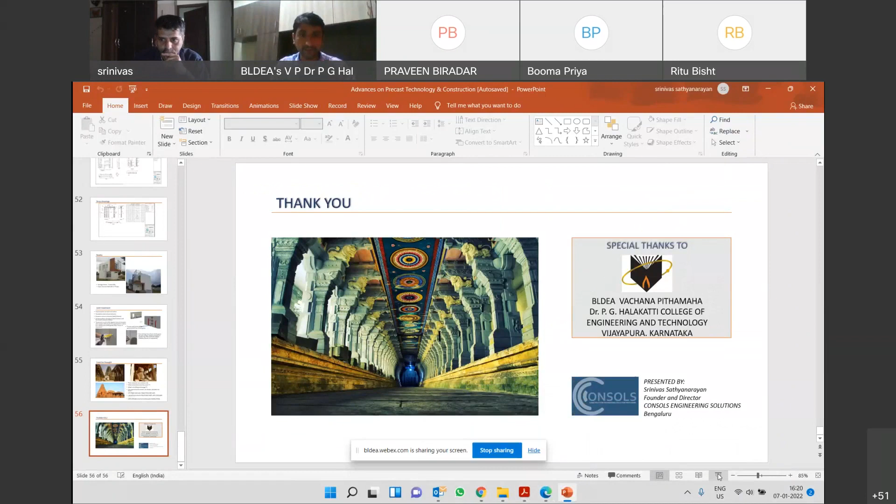It is a very interesting and informative session. I really enjoyed it. Thank you, Srinivas sir, and BLDEA College.

There is a question from Anvita Sinha: what should be the depth of foundation for that structure? Which structure? I don't think so - which structure? Okay, let us just assume. I think probably I just showed one of the villas, whatever is there.

So I think it is definitely very similar to what we do in conventional construction. There's nothing special there. Based on the safe bearing capacity we have achieved, that is where the foundation was actually laid, and the analysis was done very similar to what we do for cast-in-situ structures. So whatever sizes we achieve, we have just converted that into a precast member, and we have checked the entire elements such that it can be lifted and handled easily. That's it.

Any other questions from the participants? You can unmute yourself and ask the question to the sir.

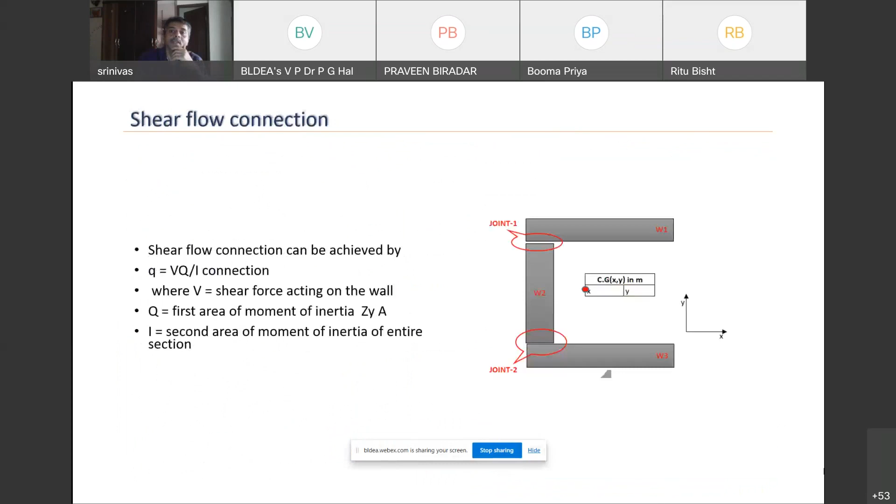From Anvita: what should be the minimum grade of concrete and minimum grade of steel for PSC? The grade of steel is always the same thing, we don't have to change the grade of steel. I've already shown you what grades of concrete we use.

This is the minimum grade we use. Whenever we are dealing with pre-stressing or pre-stressed members, the minimum grade is always M40. If we need other things, we have to increase it. We have used up to M60, especially for wall systems, columns, and also shear walls. So this is what we use, maximum is M60, and it ranges between M40 to M60.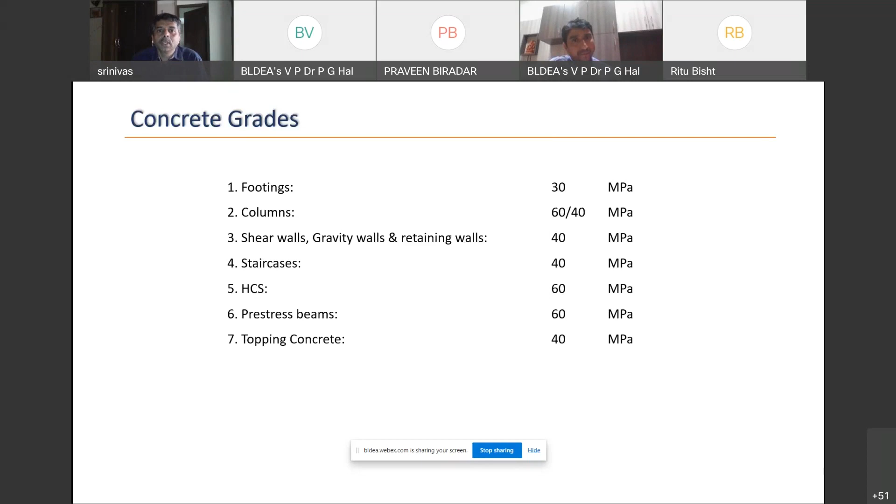So if you literally see, when I explained the connections, when we do moment connections or whatever, the beams or columns will be designed as per whatever you do in a cast-in-situ structure itself. So all your earthquake loads, everything, including wind loads, everything will be considered and it will be designed. The rebars will be for that.

There is no kind of leeway with respect to that. We don't consider this, no way. We have actually designed the hospital structure in Coimbatore, which is in zone 3, and we have also done all ductile detailing, everything is done in that.

It is very similar - you don't have to worry, suppose when you see a finished product, whatever comes inside the beam in a cast structure will be very similar here, except for some things. What we have to do is analyze how the lifting would occur, or how it behaves when placed without any moment connection. Those things we'll analyze, take care of, and then give the final element.

There's no compromise on any lateral forces. Thank you for this answer, sir.

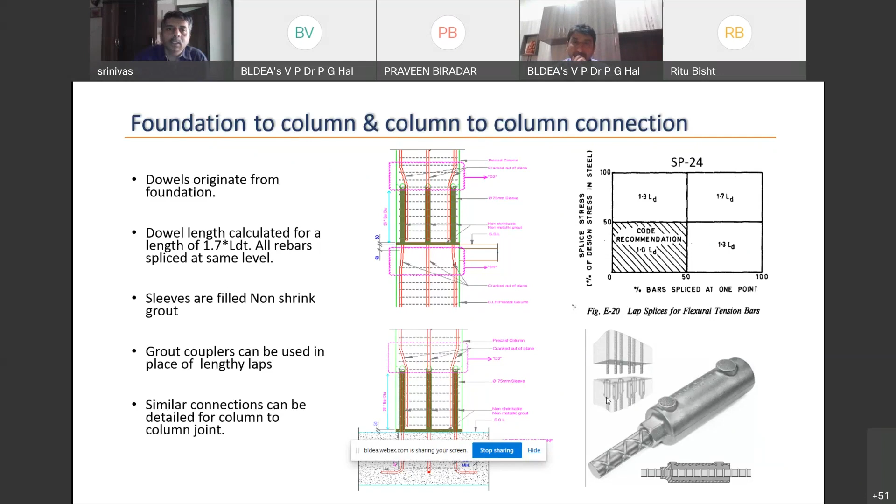One question from Tausif Attar: What about repair and rehabilitation of PSC structure? Repair and rehabilitation of PSC structure, or pre-stressed, is that what he means? I think it means pre-stress, precast.

One has to see what kind of repair it really requires. Suppose if there is some kind of failure which has undergone due to some kind of load, as anybody would do a kind of retrofit, one has to see what kind of cracks it has really developed. So we have to see that.

As you say, the easiest way one can do is by giving extra support. If that is not acceptable, then we can have an extra steel beam coming in. If that is not acceptable, then carbon wrapping comes in. So all these things can be done, and especially if it is a pre-stressed member, we have to be a little careful, because once some kind of cracking happens, we have to see what is the loss, and based on that we have to accommodate the particular design or do something for that. That has to be done, and it can be done. It is not something that cannot be done. So even if it is cracked at one area, it doesn't mean the entire thing is going to just come down. We can definitely go ahead and repair and do that.